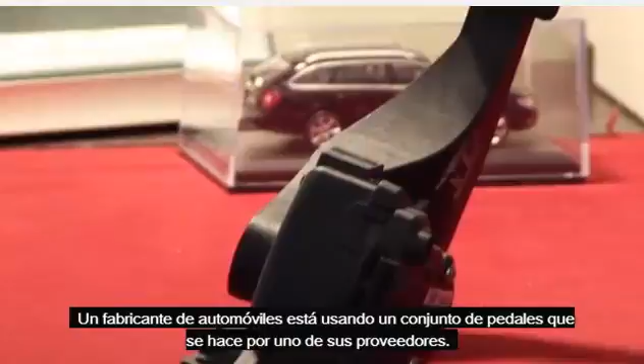The acceleration pedal is one sealed block that, if found faulty, is changed as a whole piece, and for the car manufacturer it represents a typical interchangeable component.

Unfortunately, the electronic components within the pedal assembly were of lower reliability than expected, which cost the car manufacturer a significant amount of money due to warranty claims.

At this point, about 4% of cars developed the failure within the first year from the sale date.

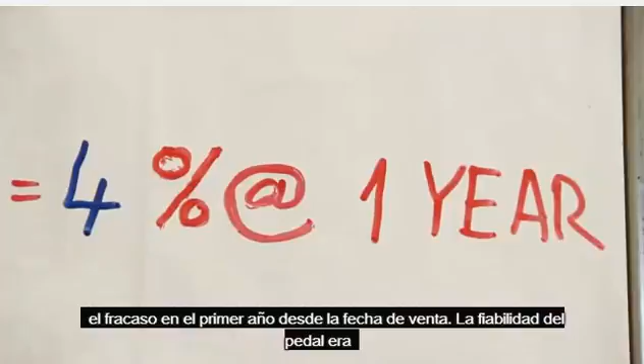The reliability of the pedal was verified, and according to the accelerated laboratory test, the MTTF, the mean time to failure, conformed to the required criteria of 8 years.

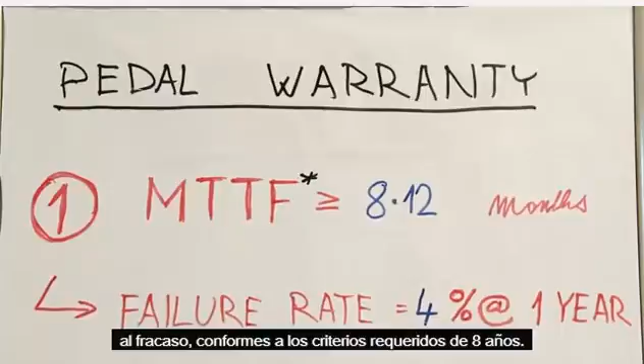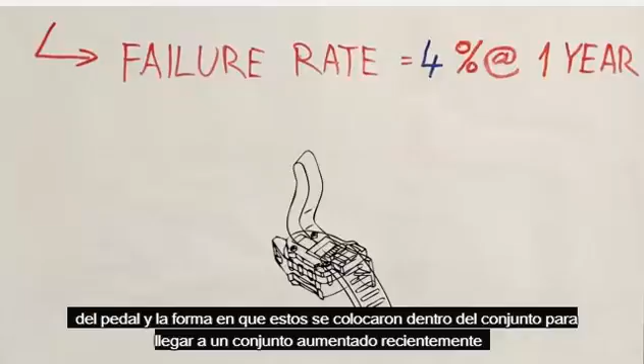As the problem was progressing, the action team decided to change the electronic parts of the pedal and the way these were positioned within the assembly to reach a newly set increased target of 10 years.

The improved design was successfully tested for the new target and implemented to production. Up to this point, the team solved the problem successfully.

But after about 8 months from the start of production, the cost of the warranty claims for the pedal assembly was still at about the same level, and according to the data, the failure rate even increased to about 6% within the first 12 months.

Not surprisingly, reliability is from the beginning to the end dependent on the use of statistics, as the time for which the components are actually functioning is a typical random quantity.

From the statistical point of view, reliability in general is not very different from other problems. There are some special approaches, but in general there still are metrics, distributions, quantiles, estimates.

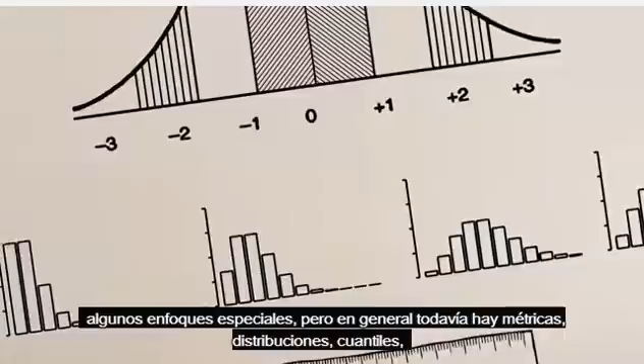But the real challenge is the engineering part. Due to the complex nature of possible failures, reliability is not very intuitive.

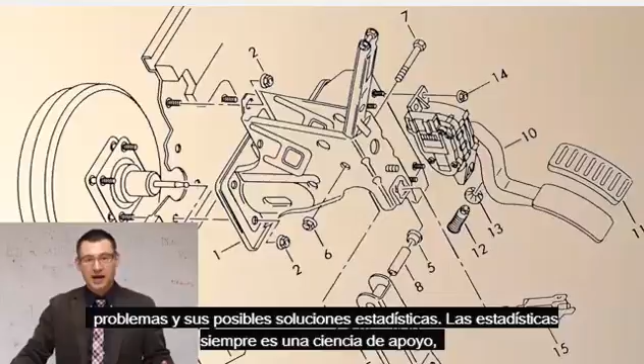It is especially important to pay close attention to cooperation and agreement between the technical problems and their possible statistical solutions. Statistics is always a supportive science, which can never substitute for technical competency.

But the more advanced the technical competency, the higher the benefits from the use of statistics.

The investigation of the problem was actually easier than one may expect. In this case, it was not necessary to review the relevancy of the laboratory tests, which is usually the most puzzling problem, but it was necessary to challenge the way the reliability itself was measured.

As mentioned, the reliability here was expressed as a mean time to failure, which is the metric commonly used for non-repairable components. Its calculation is quite easy.

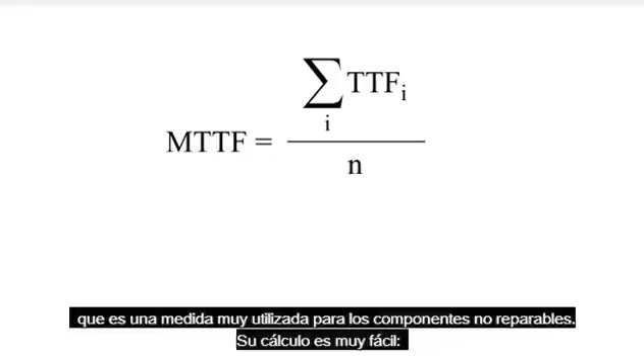You take a set of components, subject it to a test, mostly in laboratory conditions, and measure the individual times to failure. The mean time to failure is just the average of the individual times.

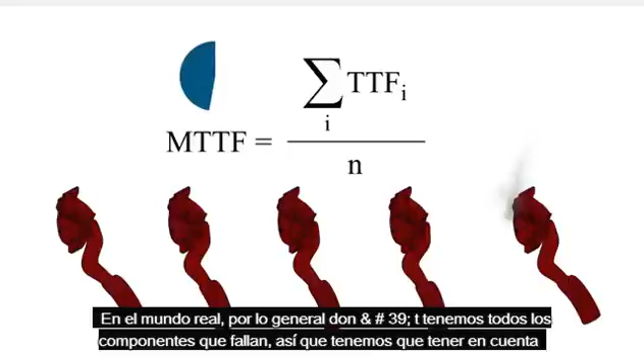In the real world, we usually don't have all components failed, so we need to account for those that survive till the end of experiment termination as censored observations.

Many times, we need to combine data from various sources, like different types of laboratory tests, real condition tests, and customer application reports. And also, the time to failure can seldom be approximated by normal distribution.

So the calculation of the confidence bounds of the MTTF is not as straightforward as it is, for example, in measurement system analysis. The key for understanding reliability is the statistical distribution associated with the time to failure.

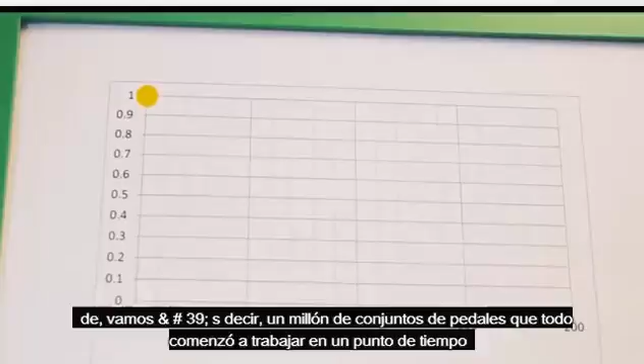The reliability itself is defined as the probability that the component will be functional after some period of working duty. We can picture a hypothetical large group of, let's say, 1 million pedal assemblies that all started to work at one point in time and were all functional at that point.

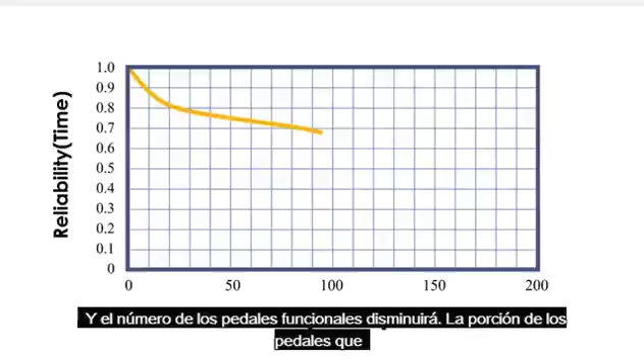As time elapses, some pedals start to fail, and the number of functional pedals will decrease. The portion of the pedals that are still functional is equivalent to the probability that any single pedal is functional at that time.

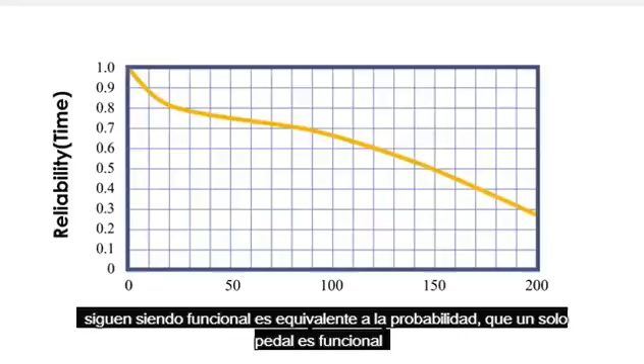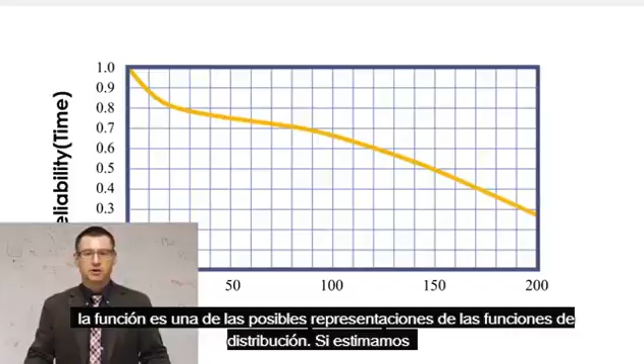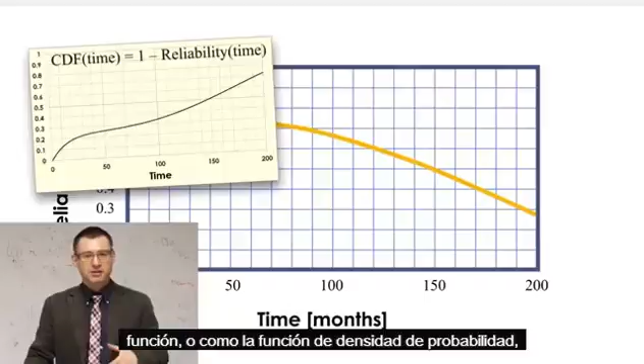Statistically speaking, the presented reliability function is one of several possible representations of the distribution function. If we estimate the reliability function, we can easily picture it as, for example, the cumulative distribution function, or as the probability density function, or the famous bathtub curve, officially known as the hazard function or the instantaneous failure rate.

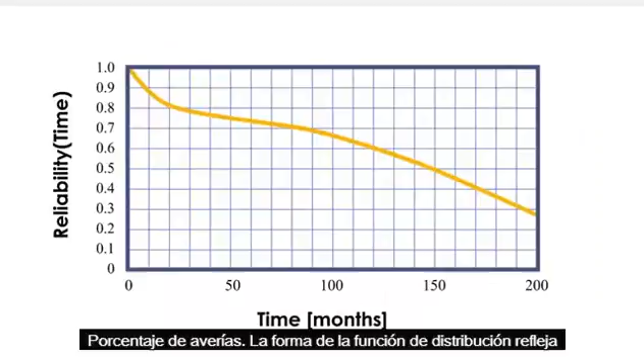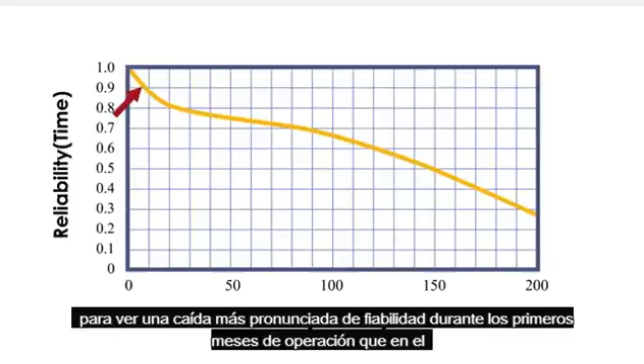The shape of the distribution function reflects all the different phenomena that can develop into a failure. It is not unusual to see a steeper drop of reliability during the early months of operation than later. I exaggerated the presented picture compared to real situations for the sake of the presentation. We usually need to zoom into the early months region to see what is happening.

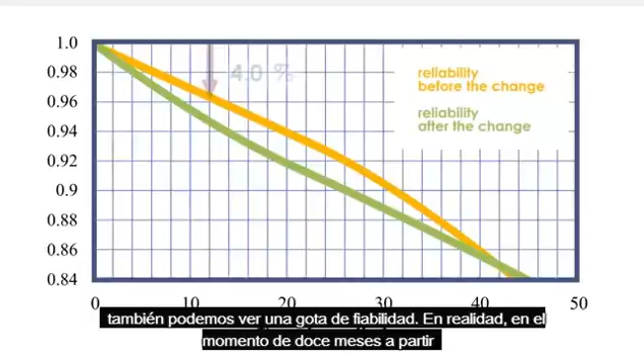But if we zoom into the upper left corner, we can also see a drop of reliability. Actually, at 12 months from the sale date, the drop of reliability from 96 to 94.5% corresponds exactly to the observed failure rate increase from 4 to 5.5%.

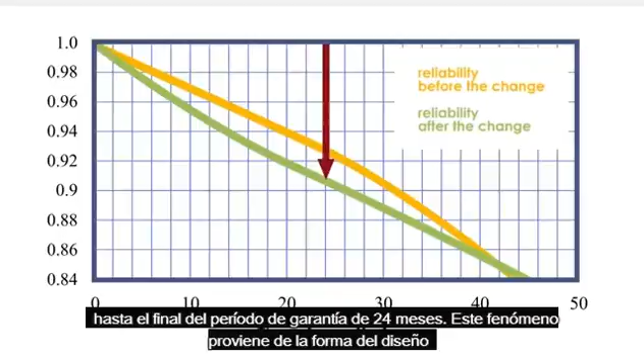And this situation is likely to progress further until the end of the 24 month warranty period. This phenomenon comes from the way the design improvement was made.

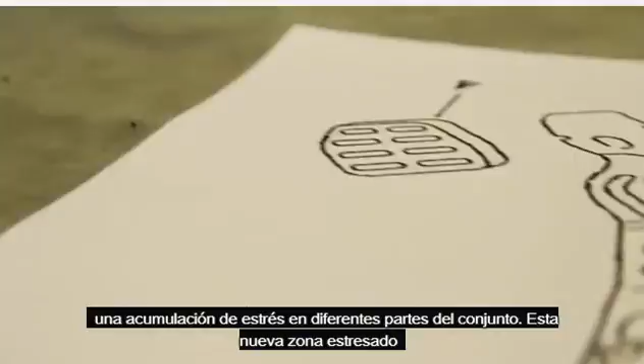In order to increase the mean life, the designers reinforced some parts of the assembly, which had the desired effect. However, at the same time, this change caused an accumulation of stress in different parts of the assembly. This newly stressed area was not that sensitive to the new load, but the few parts that failed actually failed quite early.

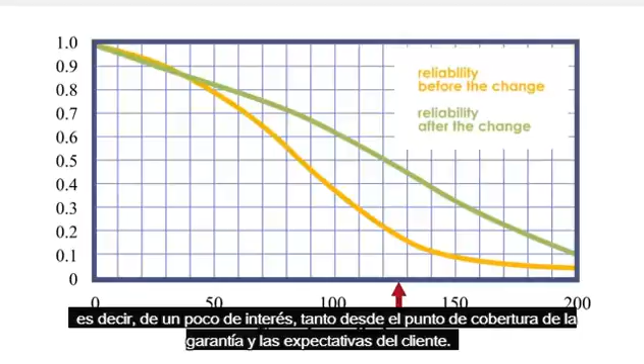The reason the team did not see the unfavorable effects of the improved design lies in an inappropriate definition of the reliability target. The mean life which was used here is reached at a point in time that is very distant, and that is of little interest both from the point of warranty coverage and customer expectation.

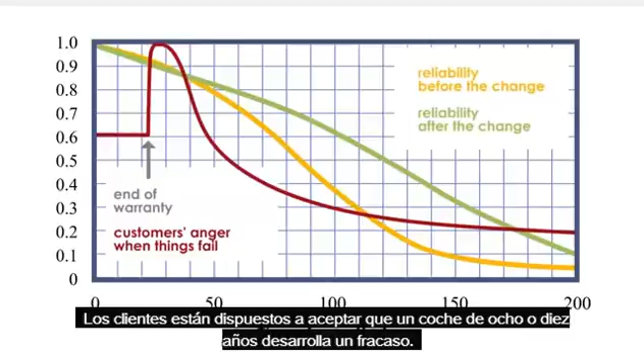The customers are likely to accept it when an 8 or 10 year old car develops a failure. What we really need is a high reliability in the defined interval from the beginning of life, and that high reliability is certainly higher than the 40 or 50% reliability at the mean lifetime.

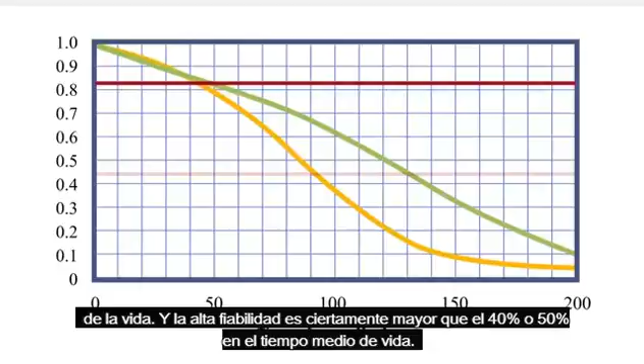The solution must therefore begin with a redefinition of the reliability target. We can do that by setting certain fixed points in time and a minimal reliability at those points. Let's say we want to have less than 4% failure rate by the end of the warranty period.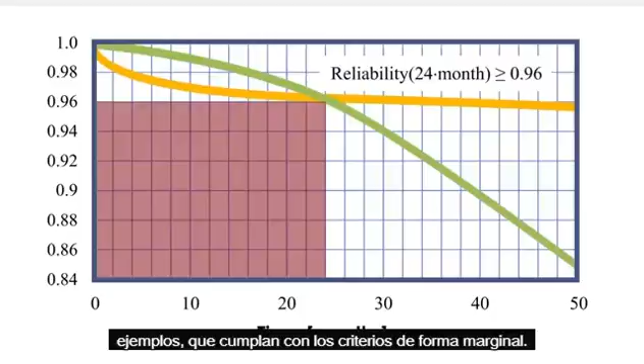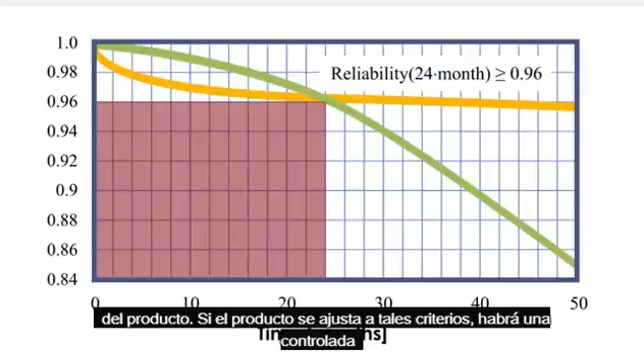Now we have set a target in such a way that the design team can use it for the optimization of the product. If the product conforms to such criteria, there will be a controlled level of failures and warranty claims, regardless of the mean time to failure.

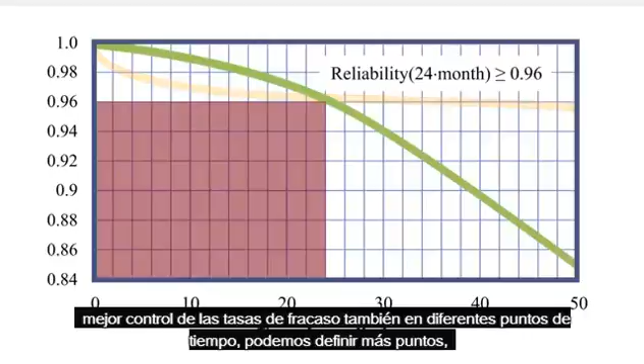If we want to better control the failure rates also at different points in time, we can define more points, or maybe a curve.

Please remember that MTTF is not a good measure of reliability. The improved MTTF may or may not mean an increased reliability at the time we actually need it, and it is therefore only confusing to people who design or test the product. In most cases, the entity MTTF can do more damage than good.

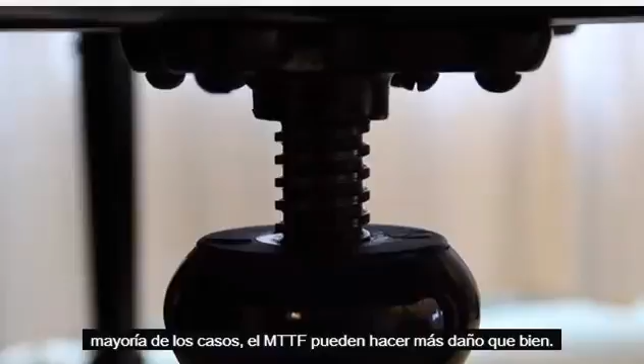The technical, statistical, and economical approach to reliability problems can get the matter only so far. There is a level which needs to be addressed from the ethical and philosophical standpoint, and vice versa. The ethical aspects shall be accounted for in the technical and statistical solutions.